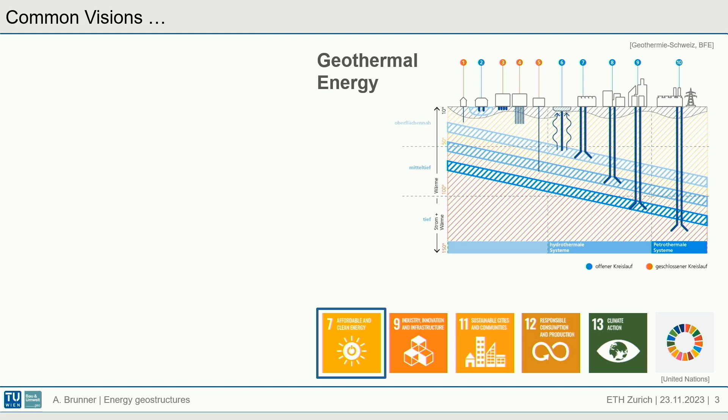We heard a little bit about climate impact of civil engineering today already, and we all know these 17 UN goals. I believe the geothermal energy area has to do with several of these UN goals, most importantly number 7, affordable and clean energy, but also infrastructure, sustainable cities and communities, responsible consumption, and climate action. The construction sector is a huge emitter of CO2, but also the building sector itself is a large CO2 emitter, simply by heating and to some extent cooling our buildings. Geothermal energy is one way we can meet our climate goals, or at least approach them.

I want to focus on shallow geothermal energy because, as you probably know, there are a lot of different areas in geothermal energy. At our institute, we focus on shallow geothermal systems, mainly but not exclusively closed-loop systems. I will talk about those in a minute, especially energy geostructures. I'll talk a little bit about the characteristics and peculiarities of these structures and about our focus of research, and finish with some long-term monitoring data from the Lainzer Tunnel and field-scale energy pile tests.

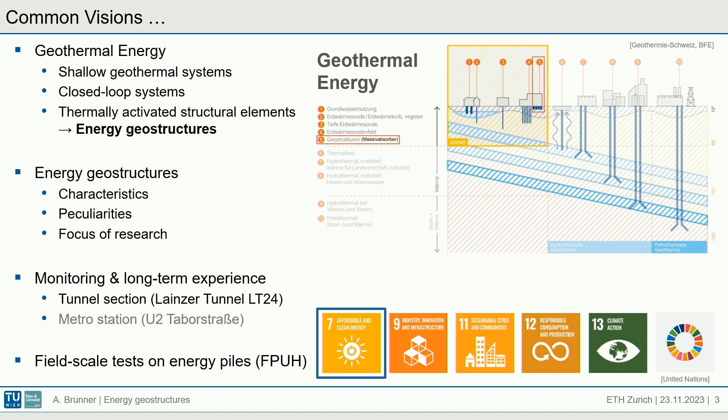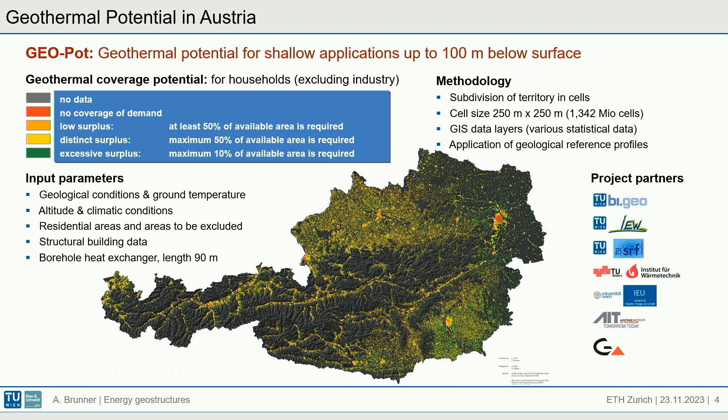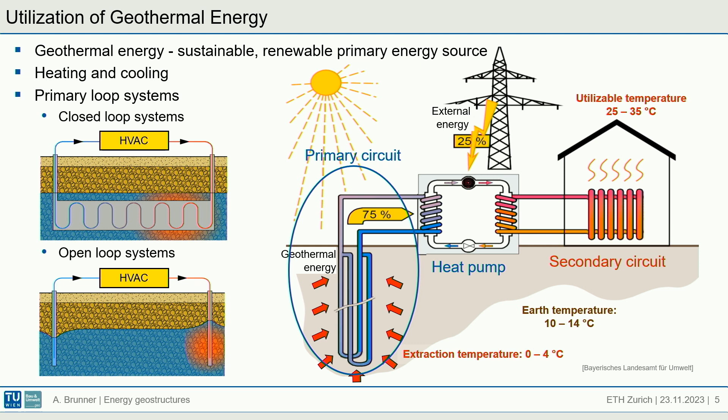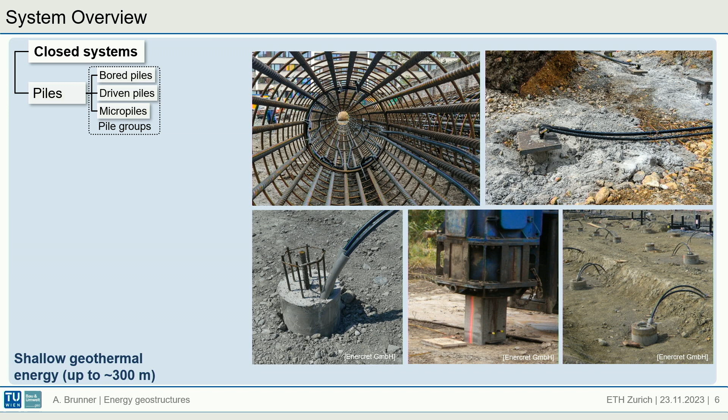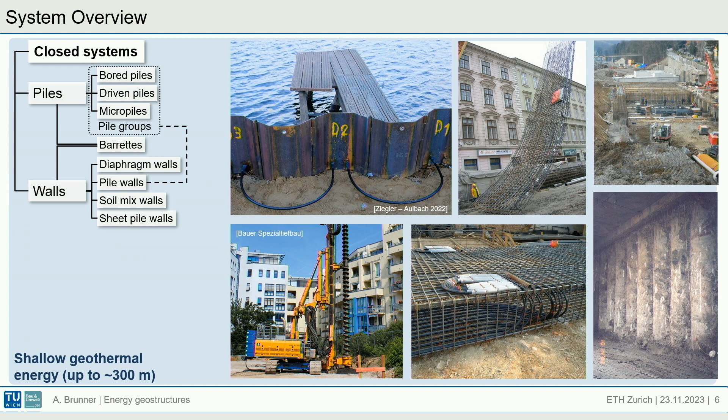And closed systems here. With closed systems, I mean we put some tubes in the ground or in some structures, here for example in some piles, and we circulate some heat exchanger fluid in those pipes. We can use different structures, different kinds of piles, barrettes, some wall elements, diaphragm walls, pile walls. There are a lot of different ways we can use this system and extract energy from the ground, also inject energy into the ground. We can also use base slabs, tunnel slabs, lining segments.

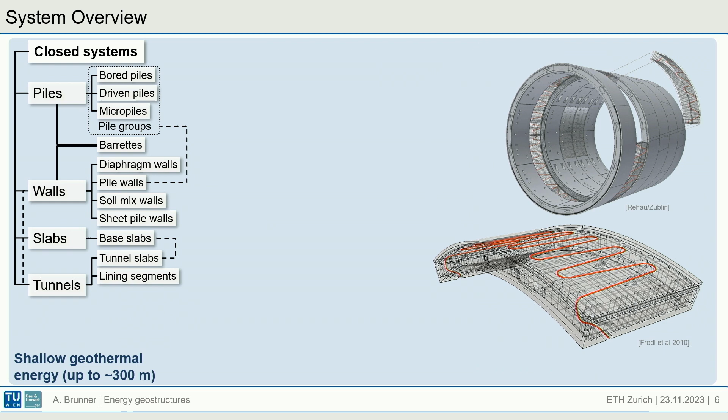So all these structures which are underlined in blue here is what we call in German Massivabsorber, basically thermoactive concrete structures. So the pipes are embedded in concrete, and these have some positive effects on the heat exchange.

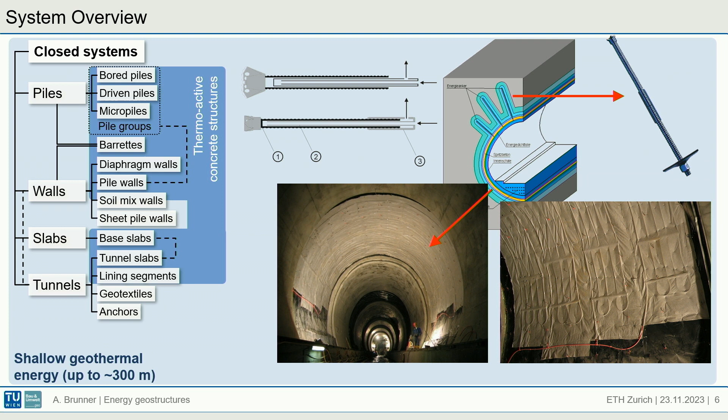Of course, there are also other methods as well. At TU Wien, there were some research projects in the early 2000s concerning energy anchors and geotextiles for tunnel purposes, but also for dam constructions and so on. These are all what I would call energy geostructures, a term well coined by Professor Laloui, who wrote a famous book about this.

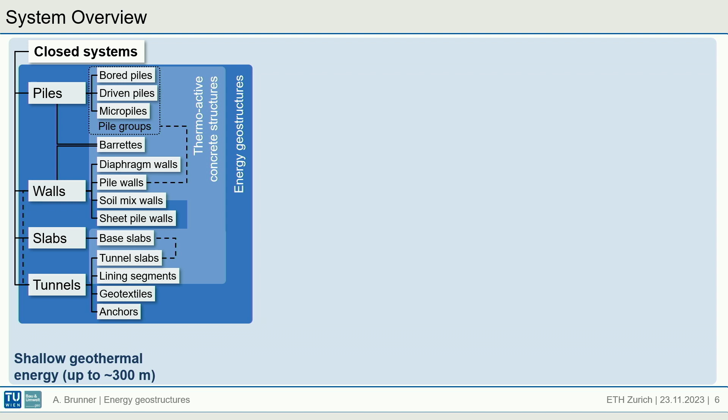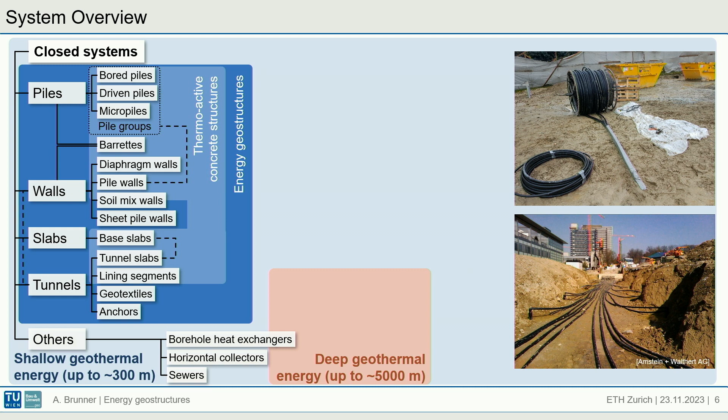What I would say about energy geostructures is that the most important thing is they are synergistically used. I would have needed those elements in any case for another reason, and I use them secondarily for energy extraction or injection. Of course, there are other systems as well: horizontal collectors, sewers, borehole heat exchangers, which are a lot more common in shallow geothermal systems but which can also go deeper than 300 meters. And then we have open systems like wells, open water usage, or deep geothermal energy.

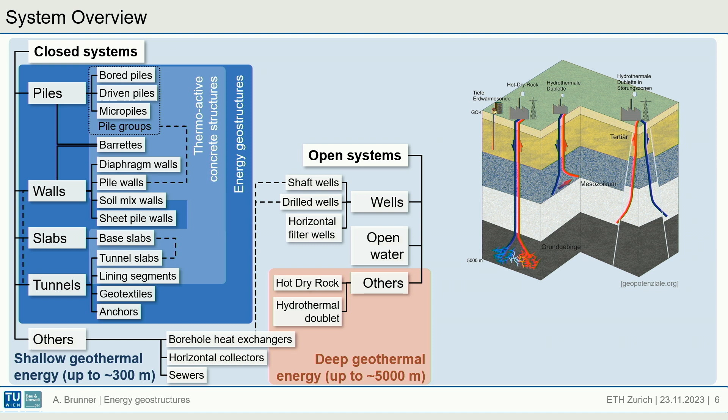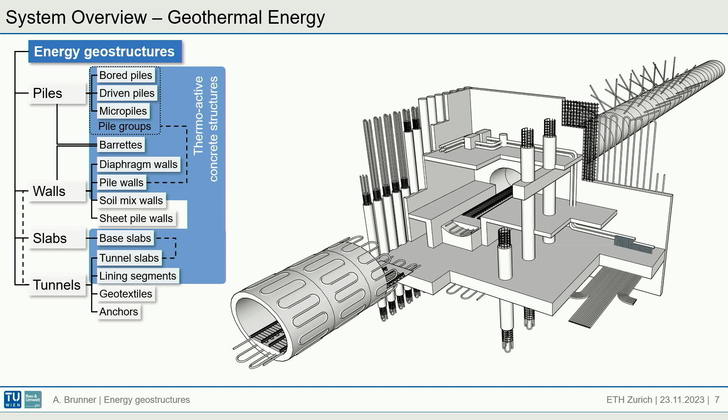Here I drew a fictitious metro station just to illustrate that basically if we have a large building, or any building, with structures in contact with the earth, we can use all of those parts as heat exchangers. So basically the entire station could be used if wanted.

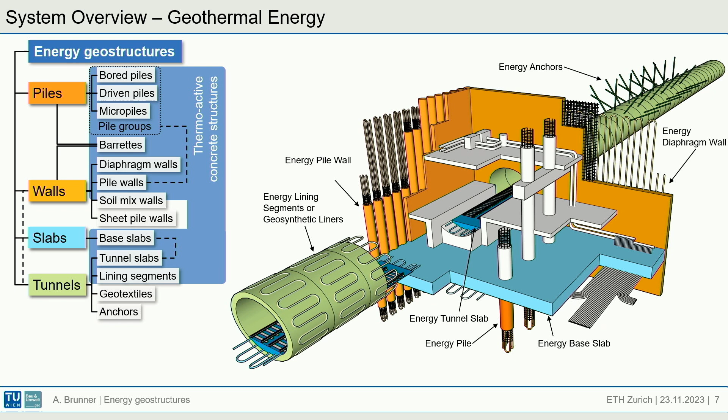So what are some characteristics of energy geostructures? I already mentioned it's the synergistic use, so I would have needed to build this anyway. The elements are very robust, and by that I mean once the concrete is poured and the heat exchanger pipes are embedded in the concrete, I see no possibility of them really getting damaged. So they will probably last as long as the building itself, 50 to 100 years.

And then the efficiency: due to the concrete, which has really high mass, the activated volume is pretty large, and the thermal properties of the concrete help us with the heat exchange. So it becomes more storage, in contrast to borehole heat exchangers, which use the ground.

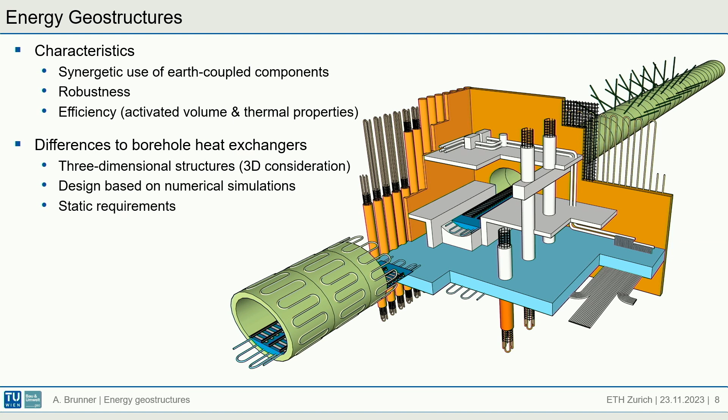There are some differences to borehole heat exchangers, and I mention this because most of the geothermal systems used are borehole heat exchangers and shallow collectors. This is a statistic from Switzerland from 2021, where we can clearly see that only 1% of geothermal energy is extracted by energy geostructures.

Borehole heat exchangers are pretty much a 1D element, so I can rather easily calculate the energy extracted from them. Energy geostructures, on the other hand, I usually have to model in 3D with numerical simulations, and I always have to consider the static requirements, since it's a secondary use, as I said.

Again, in energy geostructures, most of the elements used are energy piles. I think this is because among these kinds of elements, the pile is the easiest one—it's basically a borehole heat exchanger with a larger volume. But other elements like tunnels and walls get more complicated.

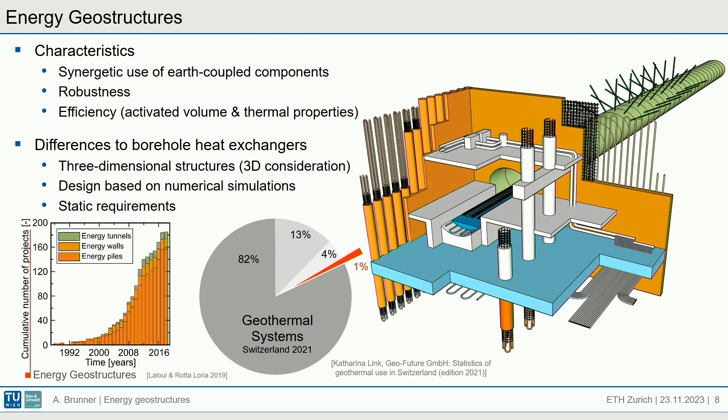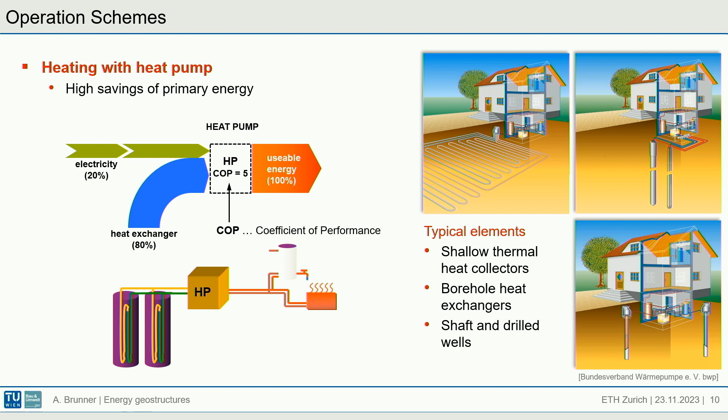I quickly want to talk about operation schemes—how can I use these systems? Usually I will couple that with a heat pump. For example, I have 80% of my energy coming from the ground and some external energy in the form of electricity. That would mean, in this example, a coefficient of performance of 5, which is a pretty average level nowadays, I would say. I can also reverse this whole operation and use it with a cooling machine.

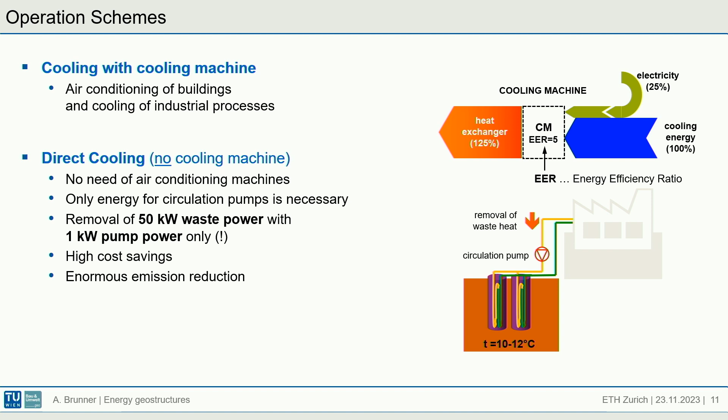Same principle, but more interesting is direct cooling or free cooling. So I don't use a cooling machine, I just circulate the water inside the pipes, and this is a highly efficient way to cool your building. The same could be done for heating as well—it wouldn't be warm enough to heat your home, but you could use this system for ice prevention on platform ramps, roads, bridges, and so on.

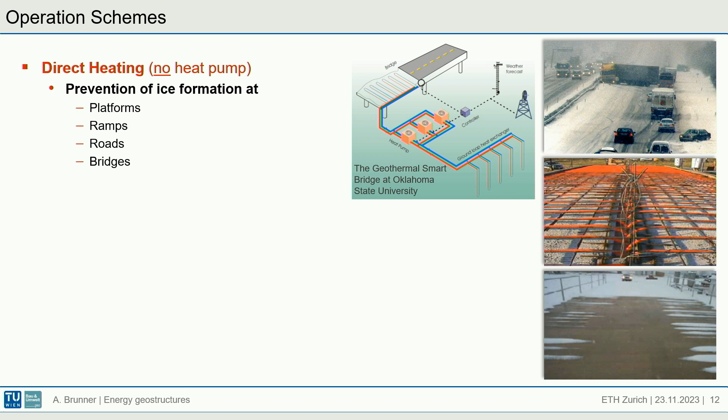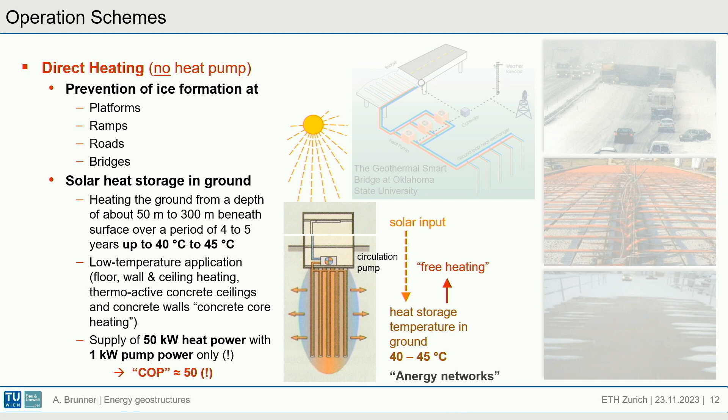One topic we want to examine closer in the future at the Institute is direct heating with solar storage. The idea is to take solar energy, heat up the ground over a few years to pretty high temperatures, and then use direct heating without a heat pump. This is also interesting in the context of anergy networks, which are low temperature networks in urban areas.

Okay, I'll just briefly go over this.

So if we have energy geostructures, we always have to think about the effects of the thermal load on the elements. First of all, we have additional stresses if the expansion is restricted. And if it's not restricted, then we have some additional displacements, and I have to take this into account. Also, to some extent, we have a reduction in cross-section.

If we take a pile, for example, a large pile, 1.20 meters, the reduction in cross-section is pretty negligible. But with some smaller piles, like driven piles, it could become important.

In our mind, the most important thing is the interaction between the elements and the ground itself. So if we have some freezing in the ground, we could alter the interaction, the interface, and have also some heaving effects in some soils. This is usually to be prevented.

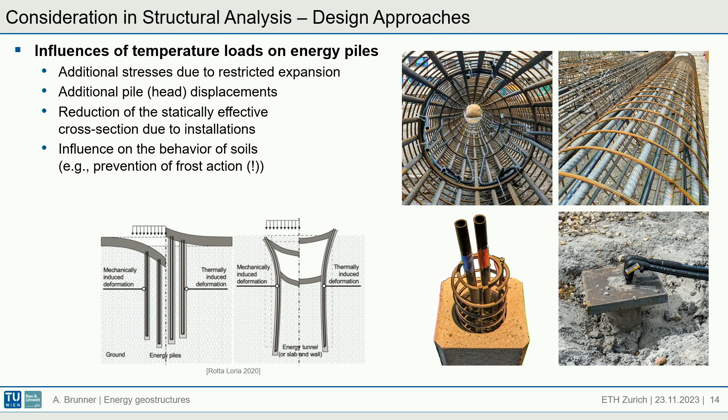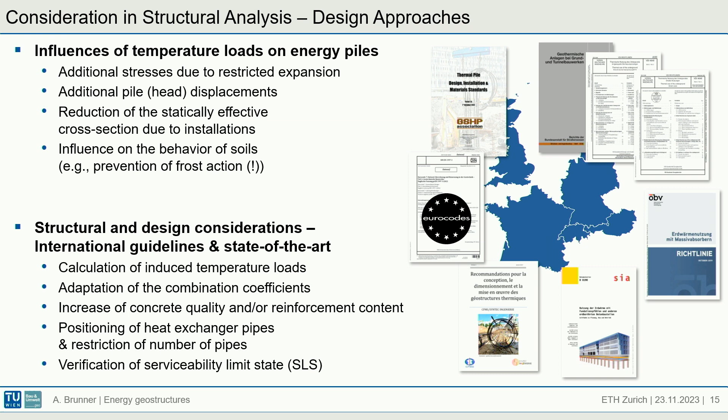How are the norms and guidelines for this? A few countries have put out guidelines regarding energy geostructures, some only for piles, some for other elements as well. Switzerland was one of the first countries to do this. I don't want to go into detail, but the next generation Eurocode, mentioned today as well, will have one annex on this, but it's only very briefly mentioned there. So we would need more guidelines and norms for practitioners on how to deal with these interactions.

One reason geothermal projects are usually not realized is that they are integrated into the project too late. Some planning has already been done, then people think, oh, we could use the system, but then it's sometimes already too late because you need to plan all this very early on. You need to know where the connection pipes are going, where the distribution block will be, and room for technical rooms for the heat pump and so on.

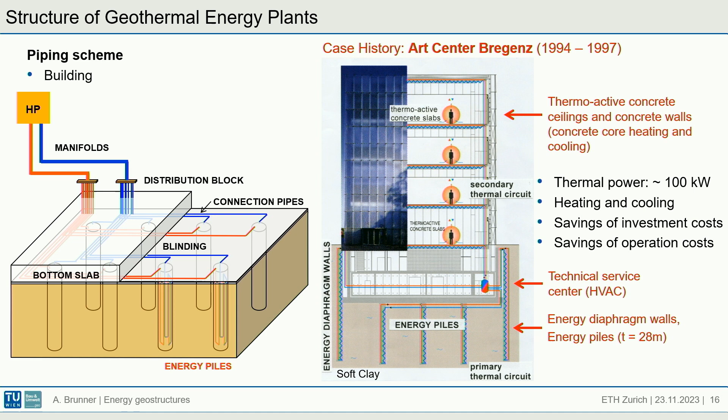One example where this was really well done was the art center in Bregenz, not far from here. This is interesting because by using energy piles and diaphragm walls with a heat pump, and also concrete ceilings and wall elements in the building that are activated, you generate a really nice climate condition, with stable temperatures and stable humidity for the art collection.

Of course, all this doesn't get easier in tunneling, but there are some good indications on that in the Austrian guideline written by Roman Markiewicz, if you want to have a closer look.

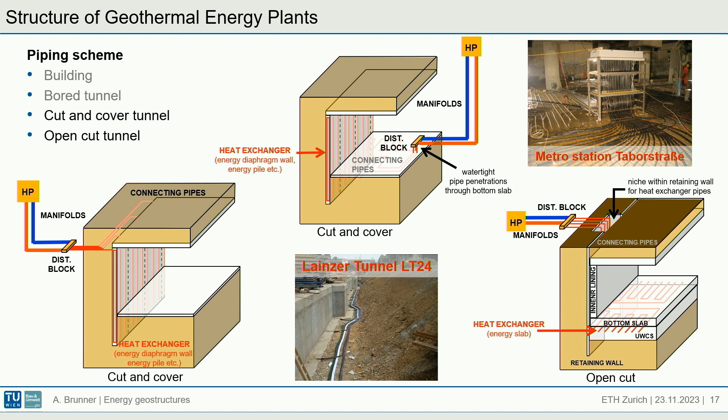I want to focus more on my topics, on the long-term experiences. First I'll talk a little bit about the Lainzer Tunnel in Vienna, and then I'll talk briefly about the metro station Taborstraße and the research project Unteres Hausfeld. So what was the Lainzer Tunnel project?

It was a railway project in the early 2000s in Vienna, one of the largest railway projects today, with a long urban tunnel. The section we are looking at, in the west of Vienna, LT24, was constructed as a cut-and-cover tunnel, a top-down method, with an intermittent pile wall. This is important because back then there were no real experiences with energy geostructures in tunnel applications.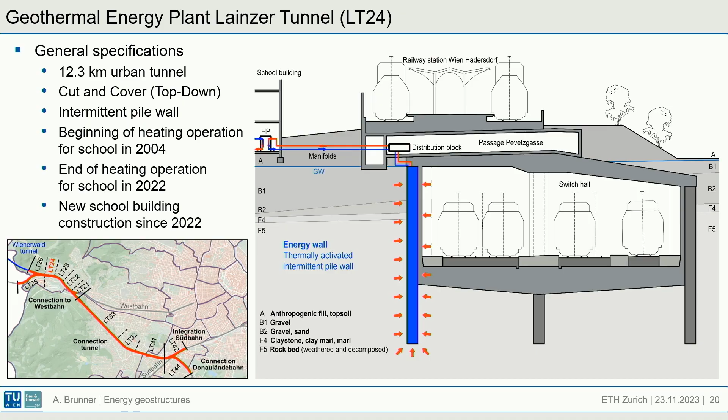In total, there were 59 energy piles. Every third pile was equipped with heat exchangers. This was done to have no or little effect of the piles on each other, so that they don't interact too much.

In total, 250 meters of tunnel were energy-activated, and what is important, it was only used for heating purposes, not used in the summer to cool the building. This is a crucial point because usually you want to have both so that the ground can regenerate, using the ground basically as a storage, as a battery. But in this case, there was only heating, so the question was also whether that would be possible over a long period of time.

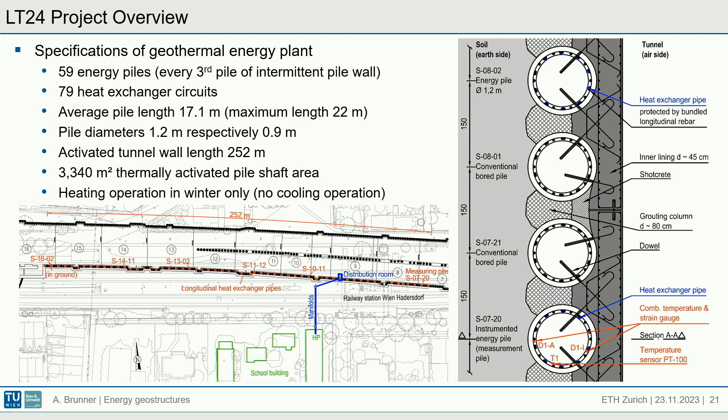Because this was very new, the Institute put numerous sensors in the elements. Most importantly, this is the measuring pile, where there were at 5 different levels, combined extensometers, strain gauges and temperature sensors, on the earth side and on the air side, so towards the tunnel, which below the slab is of course also surrounded by the ground.

We are here in the Flysch, which is weathered rock basically, with not really any groundwater movement, and the groundwater flow would be from the other direction and is pumped below the tunnel section anyway. So groundwater is not the biggest factor here.

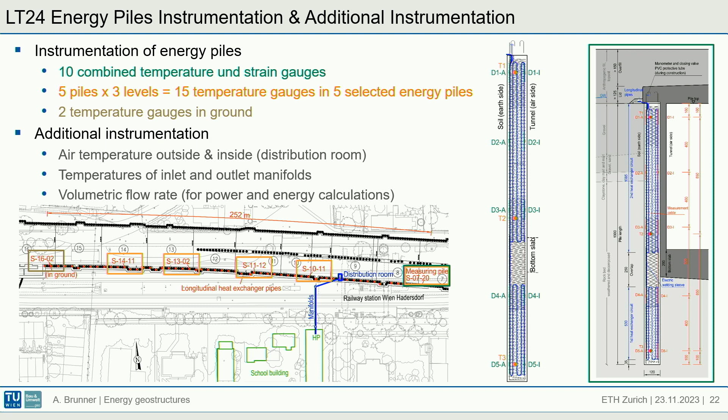So there are some additional piles which have temperature sensors, and of course we measure also the air temperature, the inlet and outlet temperatures, and some other data. So first, this is here the energy data.

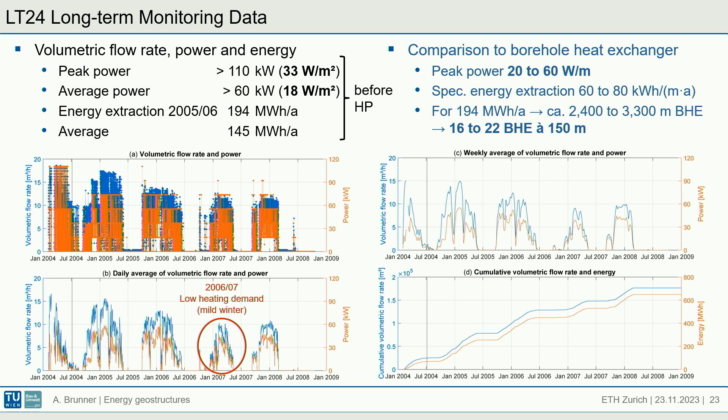I don't want to spend too much time on this, but just a comparison: if borehole heat exchangers would have been constructed instead of this, 16 to 22 boreholes would have been needed with 150 meters each. And the new school now, which is currently built, will use those, and the construction company told me that 31 borehole heat exchangers were constructed. This is probably due to the building getting larger. So this is the data over the whole data series that we have.

This is, I believe, the longest data series on energy geostructures in the world. And I just want to point out a few things: we can clearly see some mild winters, and in the last years we have only mild winters.

But then again, the inlet temperature, so the temperature coming from the heat pump going into the piles, decreased after some years, and it was below 0 degrees in the last years. So this is usually not what we want. And also the difference between inlet and outlet temperature increased.

And if we look at the temperature data in all the piles, we can see that the pile temperature dropped as well. In the beginning, all the temperatures were basically the same in the winter, but in the last year it was pretty scattered - some piles were pretty warm, some were pretty cold. And why is that?

We believe that there was no maintenance done on this entire system for the whole 19, now 20 years. That's due to some air trapped in some of the circuits. Some of the circuits were not flown through very well or at all. So this means there's a decrease in efficiency - some of the piles have to work that much harder to compensate for the others.

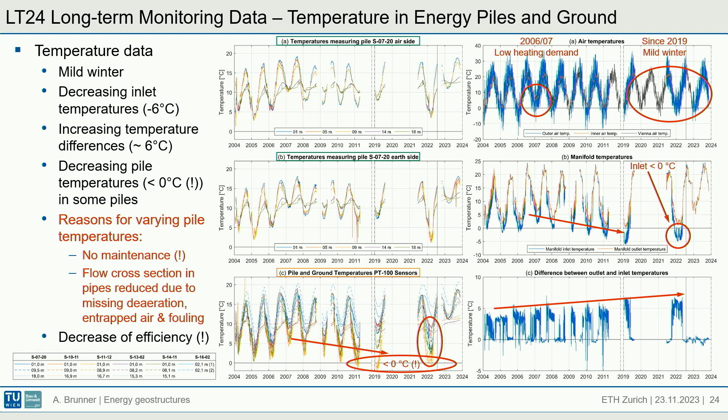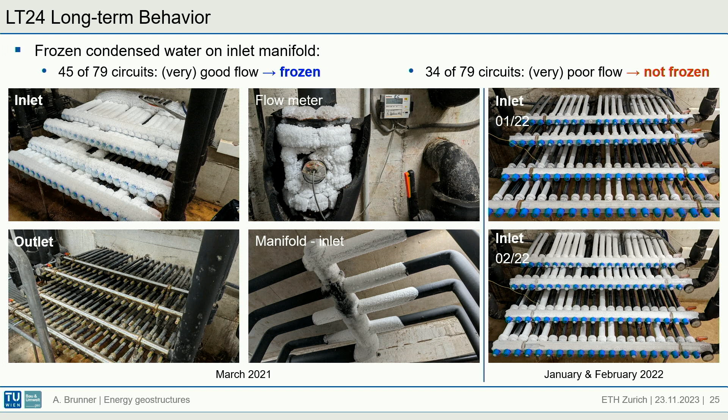Here you can clearly see that some are frozen, but not all of them, which indicates that those which are frozen are flown through pretty well, have a good flow, and the other ones not at all or diminished flow. This, of course, could be avoided if maintenance would have been done and de-aeration would have been done.

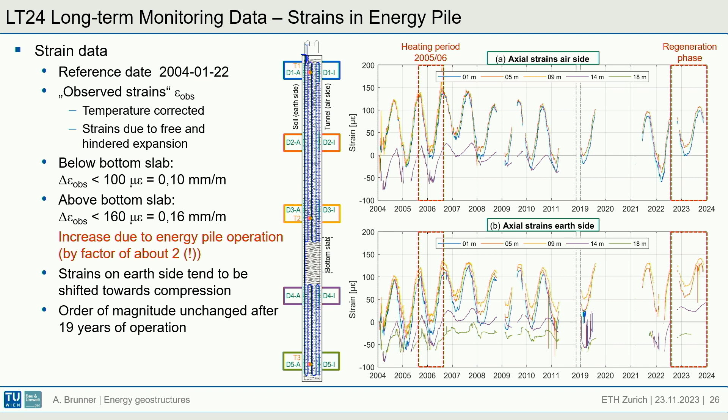The strain data - I just want to say, basically the order of magnitude of strain didn't change at all during all these years. And if we look at the regeneration phase here at the end, where the system was not operational, we see that the strains are basically half of that of the operation phase. So the impact on the structure itself is not that huge.

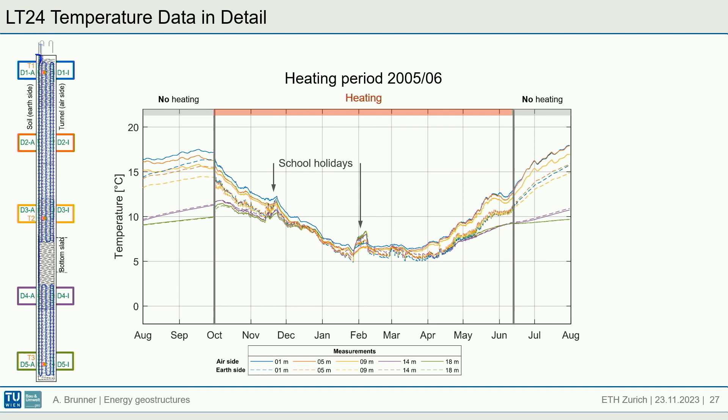If we pick out one of the years, 2005, 2006, we can plot the measurement data from here. We clearly see the school holidays. We can also see that there's a full regeneration, and this is true for all the years - at the end of the heating season, the temperature is basically back to where it started. So yes, the system functions very well without cooling.

This is now the new data with the regeneration phase, and we can clearly see the effect that not using the piles has. Below the base slab, which are these two, the green and purple one, are pretty much constant throughout the year, unlike before. And the other measuring points above the base slab are influenced by the air temperature in the tunnel.

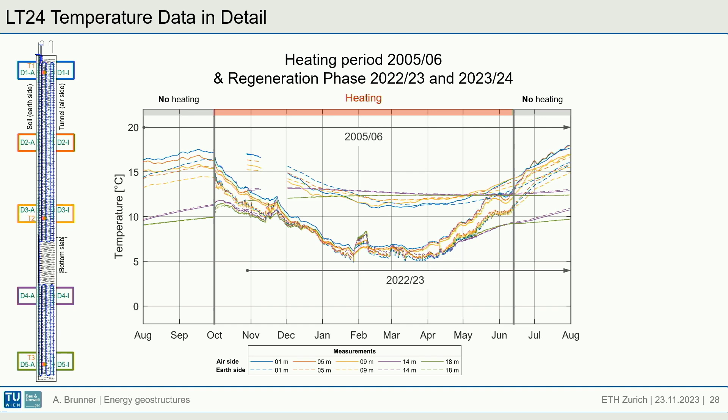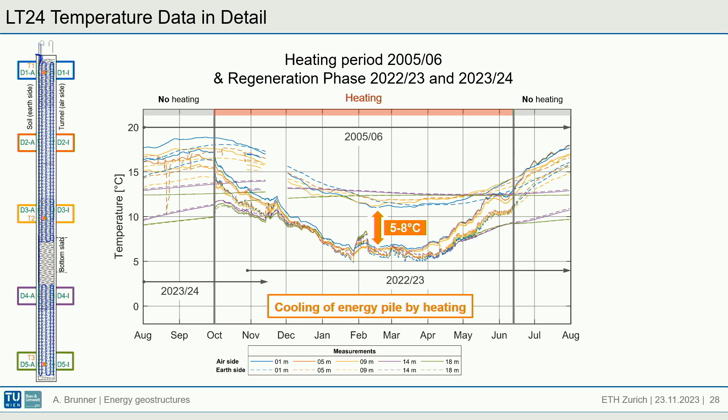And this is the newest data for the last months. Okay, so the effect the energy operation has on this tunnel section is approximately 5 to 8 degrees in total. So this is not a huge deal. And in general, generally speaking, energy operation is a serviceability issue, if any, and never really an ultimate limit state issue.

So we had an excellent master thesis from Nathalie Sagasser this year, and she modeled this tunnel section with COMSOL Multiphysics, a thermal model. The first question is always about the boundary conditions of these systems. With an energy pile, it's pretty straightforward - that's usually the easiest one.

But with tunnels and walls, it gets more difficult. I think Professor Laloui had a nice talk about this. This can make or break a project, because at the beginning you usually don't really know the tunnel temperature which will be present, and also the airflow. Usually we have a convection boundary condition inside the tunnel.

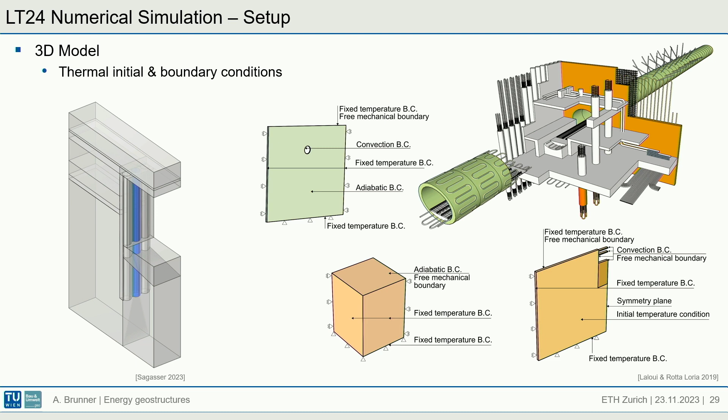In our case, we didn't know that - we don't have sensors for that yet, but hopefully will get some. So we used the fixed temperature boundary condition in the tunnel, where Natalie did some really nice work to approach the real temperature.

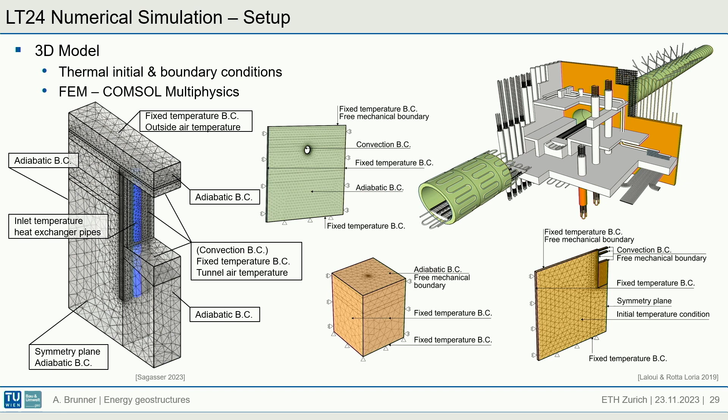So the results are here. Without any energy operation, you can clearly see that the pile below the base slab is approximately the ground temperature, and the whole system is governed by this tunnel air side.

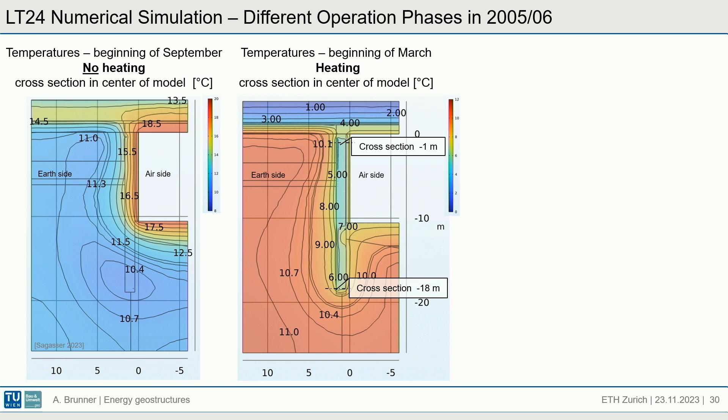With energy operation, of course, it's different - the pile has pretty much the same temperature throughout its depth. Inside the pile, if we look at cross sections, we can clearly see the effect of the inlet temperature, which loops around, coming in colder, going up and down the pile, and getting warmer.

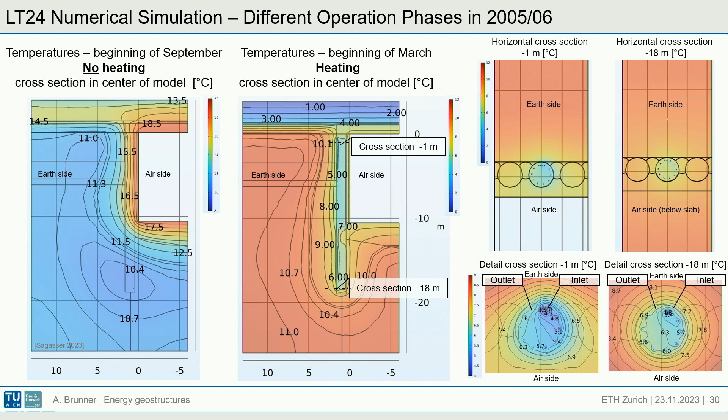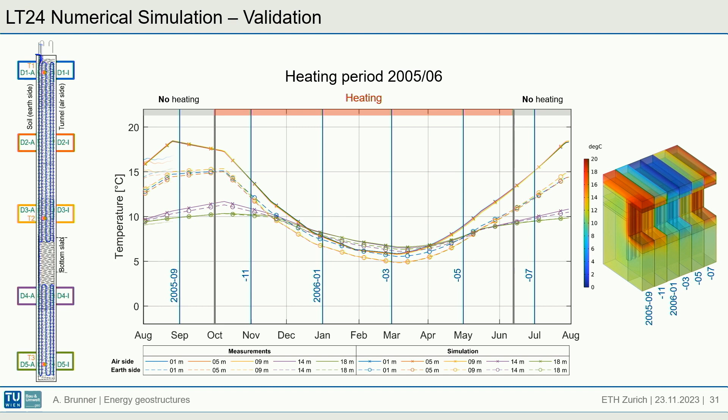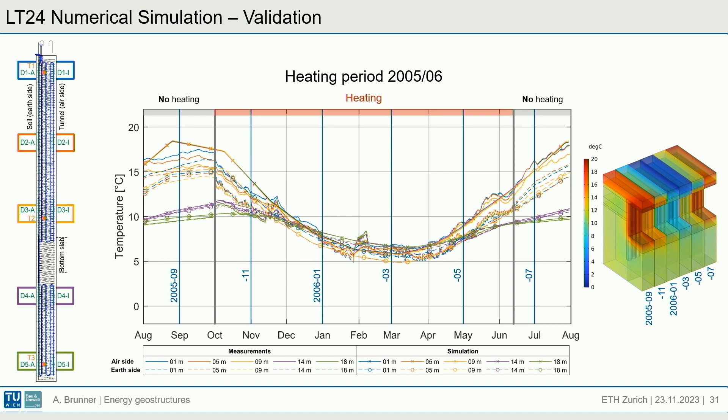So if we look at the results of the numerical simulation, we can plot this for our year 2005-2006 and get these results. If we plot our measurement data on top, we can see this fits perfectly. We want to use this model in the future to look at other years, to look at the regeneration phase, and also to be able to predict the behavior of future tunnels.

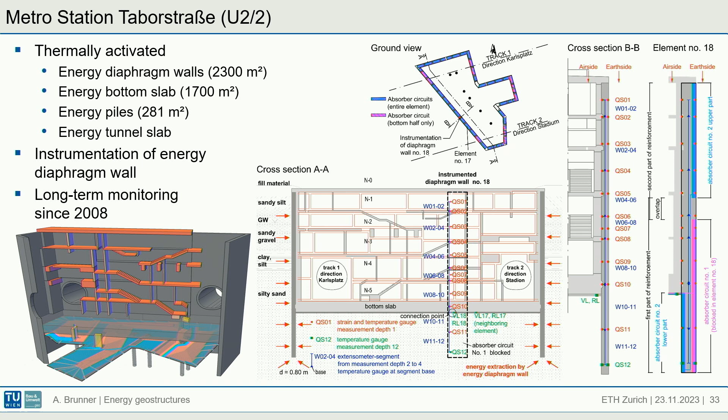Here we have different systems altogether - diaphragm walls which are activated, the bottom slab as well, the piles, and the tunnel slab. All of this is interconnected, and it's hard to analyze the data with measurements taken just at certain points. But we measure the diaphragm wall here since 2008, and have some really nice data as well.

So the last topic is the thermomechanical behavior of energy piles. We were, of course, not the earliest ones on that - I think Professor Laloui did some pile tests in the early 2000s, also in London, the US, and Australia, and many more places. But there are some aspects to our pile test which are quite unique, I think.

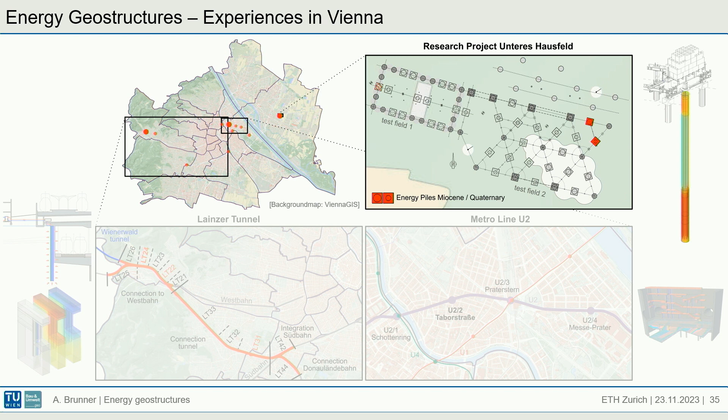So we are located here in the east part of Vienna. The research project was not about energy piles only, but to test various foundation elements. You can see in the two test fields a whole lot of different elements were tested for typical ground conditions in Vienna, which are sandy gravels and Miocene sediments.

So the energy pile tests involved two piles, equipped and tested for several months with different diameters and lengths, one of each in each typical soil layer. I want to focus on the Miocene sediment one today. The goal was to investigate the influence of thermal loading on the load displacement behavior of the energy piles, and my job now is to look at the data and numerically model this as well.

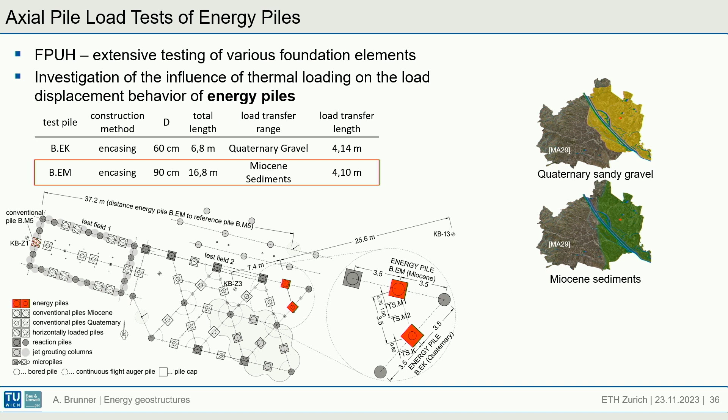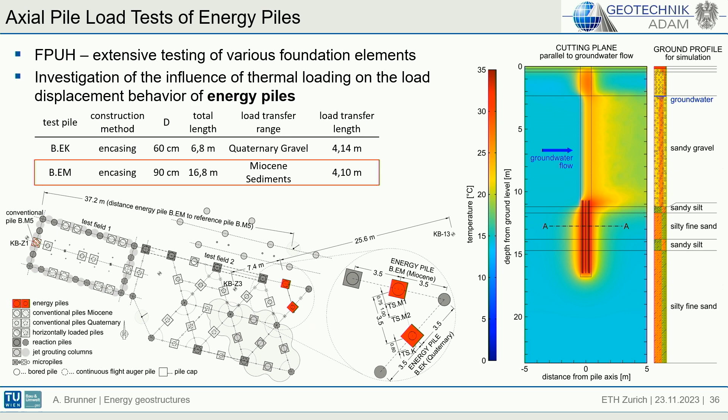So what was first done by Dr. Markiewicz was to model this whole thing thermally in COMSOL to set up a test procedure, to know how long each phase should last and what load should be used.

Then the piles were constructed, and what is unique here is that in this middle section, a double steel tube was used so that the shaft friction would only develop in the lower area, where the Miocene sediments are located. The heat exchanger tubes were also concentrated in this area - passed through from the top, looped only in these lower sections, and passed through again. The load was a dead load, so no load fluctuations would occur during those months.

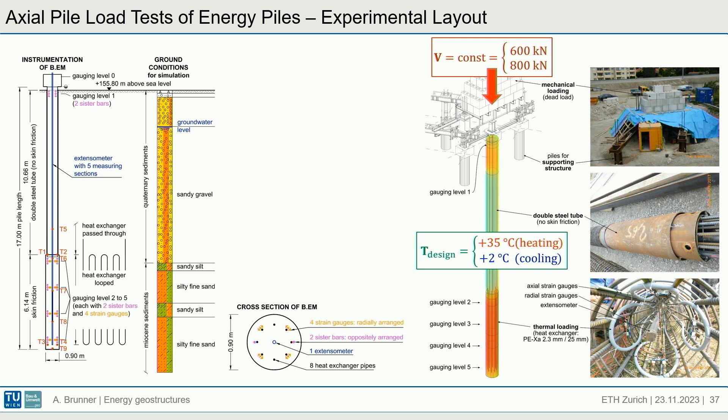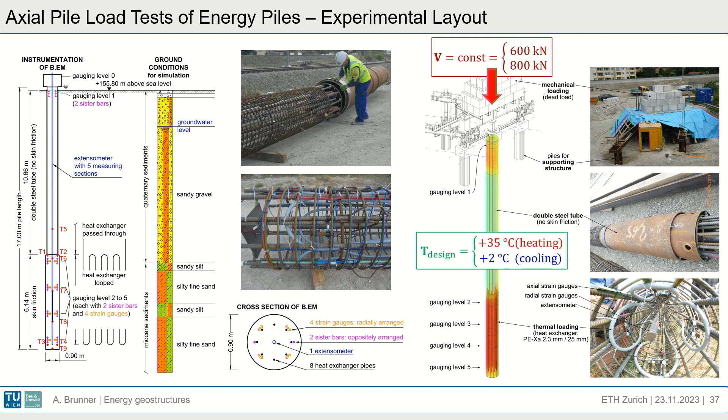The system was well equipped with numerous sensors: strain extensometers, strain gauges, radial strain gauges, and a lot of temperature sensors, of course, and also some fiber optic cables. I just had a look at them last weeks, because we just got those from the city of Vienna.

I had a look at the temperature data, and this is plotted here. You can clearly see the effect that this looping only in the bottom section has on the temperature inside the pile. The inlet temperature for the heating case was 35 degrees, and phase 1, for example, was a heating case. You can see here the temperature rising.

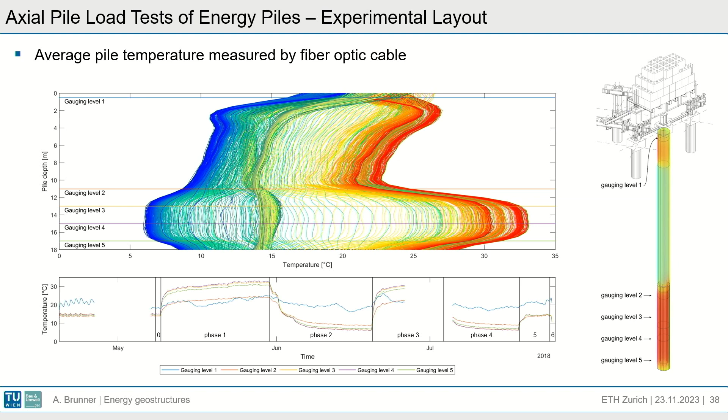Then the temperature was set to 2 degrees for the cooling case. Phase 1 and 2 had 600 kilonewtons on top, and phase 3 and 4 had 800 kilonewtons on top, again with 35 and 2 degrees Celsius. In the end, I should mention in phase 6, a static pile load test was done, and the results were compared to other piles nearby without any energy use.

So we can conclude that in these types of soils, the energy operation doesn't really affect much of the ground, even after several weeks or months, as the simulation showed as well. These are also some results that were concluded from the pile tests in London clay, I believe.

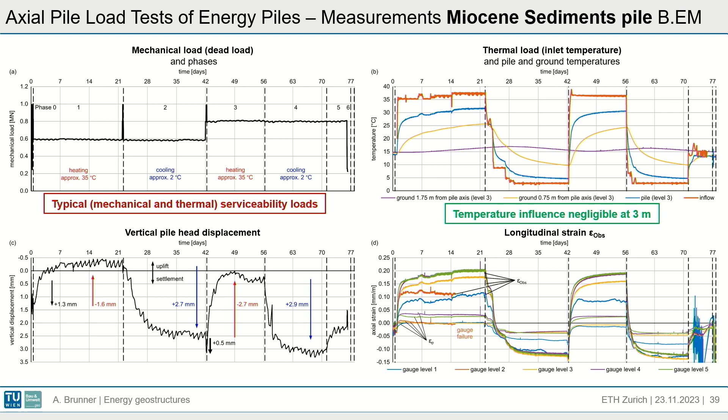So the pile head displacement is plotted here on the left bottom side, and on the right side is the strain. We can conclude from those that the pile was pretty free to move, and this is with a typical serviceability load on top. It would need a very, very much higher load on top to restrict the movement and to generate more stresses in the pile.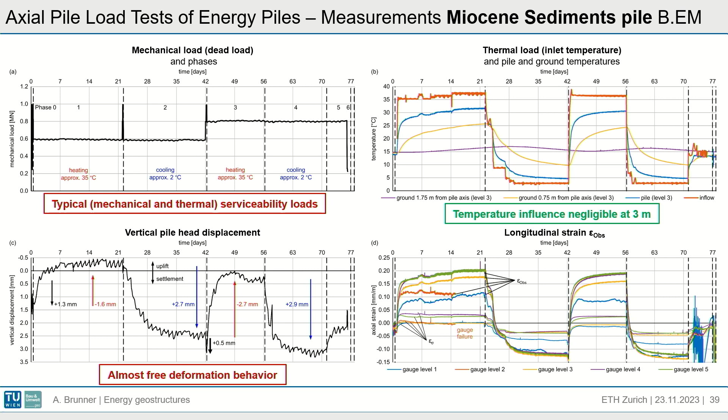Our theory is that by the cyclic preloading during the earlier phases, the ground around the pile was basically preloaded and pre-compacted, and then when the final load up to 5.5 meganewtons came, the displacement behavior was that much better. It's not that much better for the pile in the gravel sediments, which would be just marginally better than the other ones. I have to look closer into that as well in the future.

Okay, with that I'm nearly finished. Just 3 takeaway points.

Geothermal systems have been proven for decades, so the long-term measurement data we have indicate no problems with these systems at all. And there are numerous different systems that can be used, so for any construction method or building type, you can basically activate some of the parts.

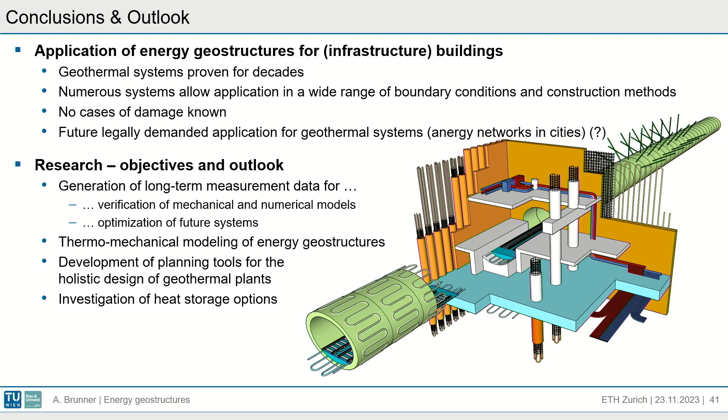My personal outlook: I want to continue the long-term measurements, which are of course used for verification of models, and also to help with the design of future buildings. I also want to have a closer look at the thermomechanical modeling of those structures, especially of the piles numerically.

One or two research focuses for our institute will be the development of a planning tool, a simple planning tool to give a quick and easy way to see if the use of any type of geothermal system is feasible, especially for Vienna at the beginning, and also to look into the aforementioned heat storage option with solar heat or excess heat. Thank you very much.

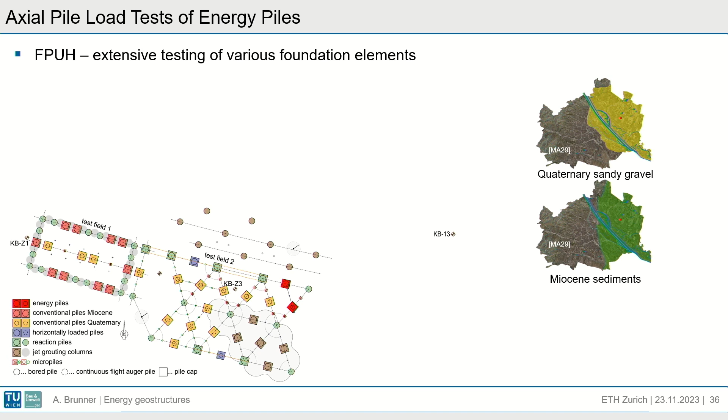You mean why they are not exactly the same each time? Okay, let's say it's a scatter. This is the first part of my question. The second part is, because you conclude that because of the thermal loading you have a better response due to cyclic loading, do you have an estimate of how much strain the soil receives due to this cyclic loading in the pile? For the second one, I don't have this answer yet, no.

And for the first, if I understand correctly, you mean there are differences in the conventional piles - they are not exactly the same, right? Yes. Well, you will always have some differences in the piles, right? So they are close to each other, but not exactly. You will have some differences, but they are pretty small, I would say, if you look at the total pile load displacement behavior. So there's just the one which is much smaller than that. Of course, if we tested more energy piles, this would scatter as well. But in our opinion, they would always perform a little bit better than the conventional piles.

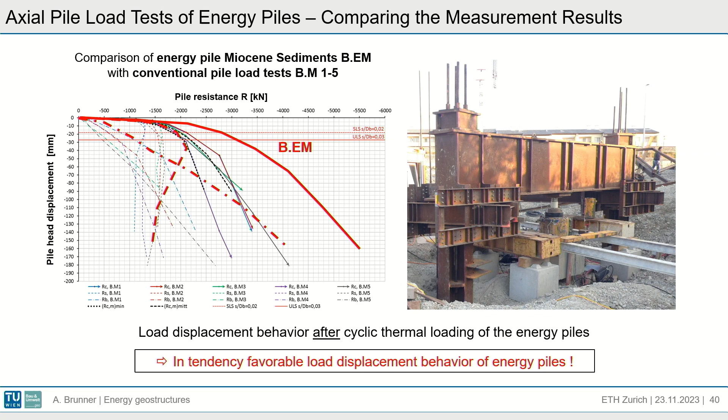I think Professor Laloui studied this kind of cyclic stuff, and as far as I remember, a long time ago already, he realized there is no significant bearing capacity increase due to the geothermal pile. Okay, yeah, that's possible. That's well, I just have this data here from our test, and this was one theory. Of course it's a theory - maybe there are some other factors at play which can explain this increase in load behavior or load displacement behavior, or this better behavior.